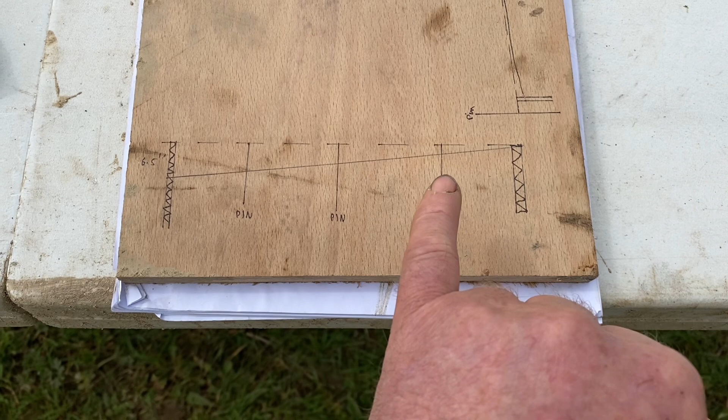So the way I've done this, and I'll show you in a minute, is we set our first tube, then knocked in a pin, and the pin is just under the length of my spirit level. I'm lucky enough to have a large spirit level, but if you've got a shorter one you just need a few more pins. Knock that pin into level, then knock that pin into level off that pin, and then when you get over to your second foundation tube, you've only got to knock that into level to that one, and we're good.

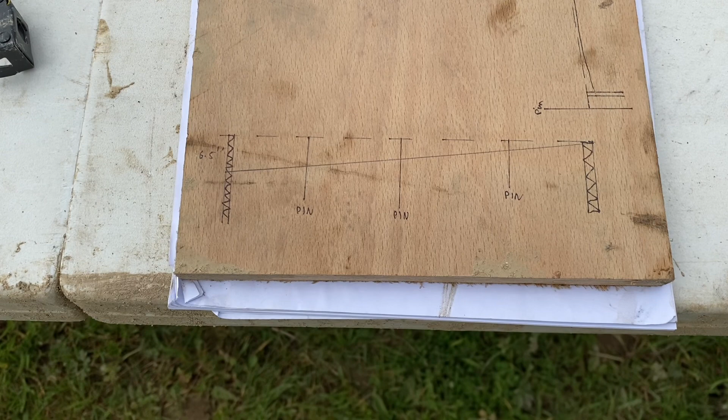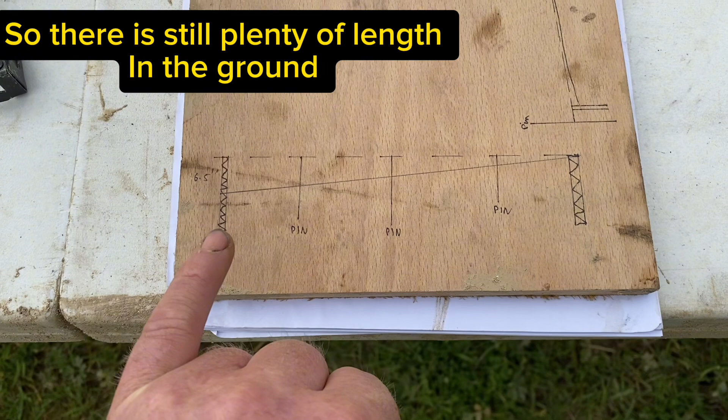Now, because I had a 6.5-inch fall, First Tunnels, who are absolutely brilliant, sent me tubes for one side that are 6 inches longer. When I ordered my tunnel, I said what I needed, and they sent out tubes 6 inches longer, no extra cost. Brilliant. Right, so that's the drawing of what we're doing.

We'll go down now and look at the theory. Not a theory - this is a theory. Look at it in practice.

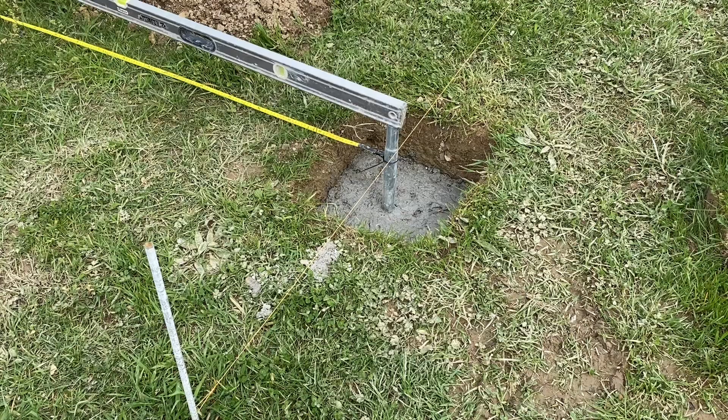Right, so previously we'd marked out and dug all the holes. So now what I did was sight the first tube and set the height with the string line. And I've concreted mine in, mainly because it's quite windy here, and also I felt just backfilling it with earth wouldn't give it the stability it needed.

So I've done that. I've mixed my own concrete because it's a lot cheaper than buying Postcrete. I just looked it up - you're looking at £13 a hole, and I've got 14 holes, so that's nearly 180 quid. Whereas the concrete, buying the cement and the aggregate and mixing it myself, I think it was like 55 quid.

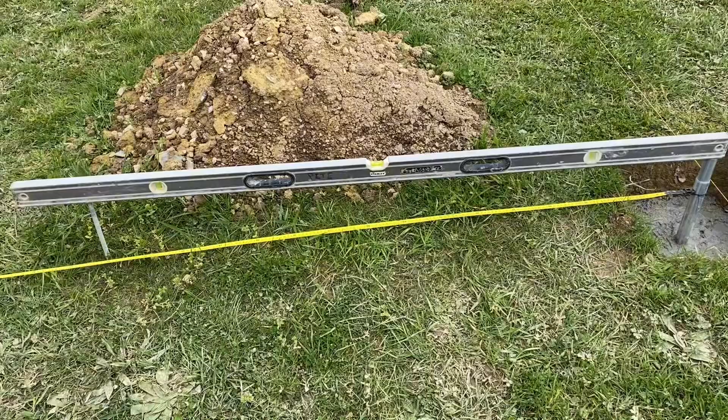Right, so like I said, you've got a slope from right to left. So what I did is have my level, and just before the end of the level, knocked in a pin. And all this is a bit of threaded bar - I find lengths of threaded bar really useful.

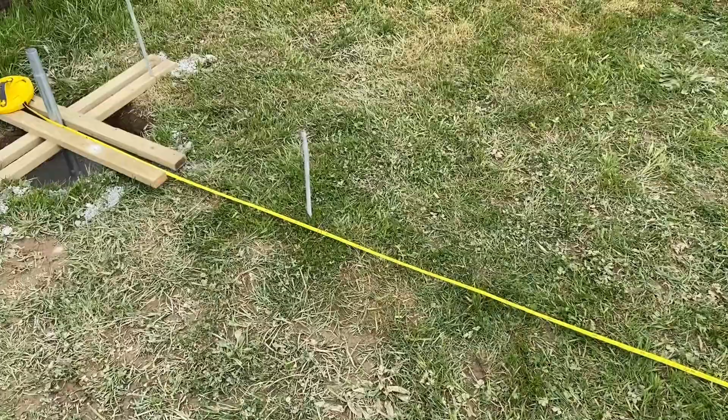So that's what we've done to that pin. Then of course we set another pin, and finally we set this height. Then you're level all the way across. And when you set your pins, just put them just outside of center, so when you're pulling your tape they're not in the way.

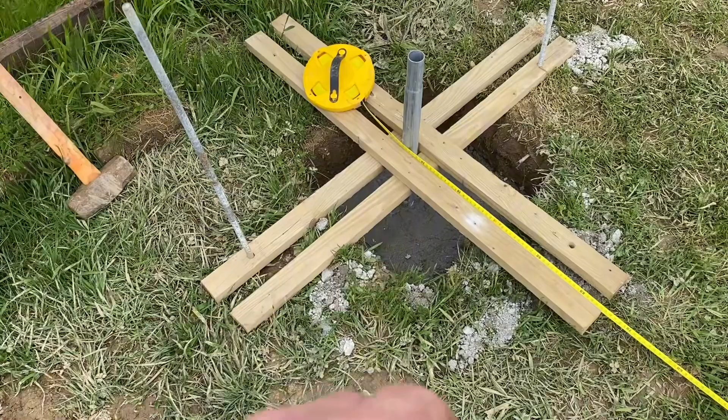What I've done is made up what I called a positioning spider. I thought I was a bloody genius when I thought of this, because trying to hold the pipe still and get it upright in two directions with your spirit level is a bloody nightmare. So what I did was cut out some batten and screwed it together so the hole in the middle was just the right size for the tube. Then I drilled a hole, and with 2 pins in opposite sides of the wood, that will hold that pipe exactly in position while you mess around with it, square it up and everything else.

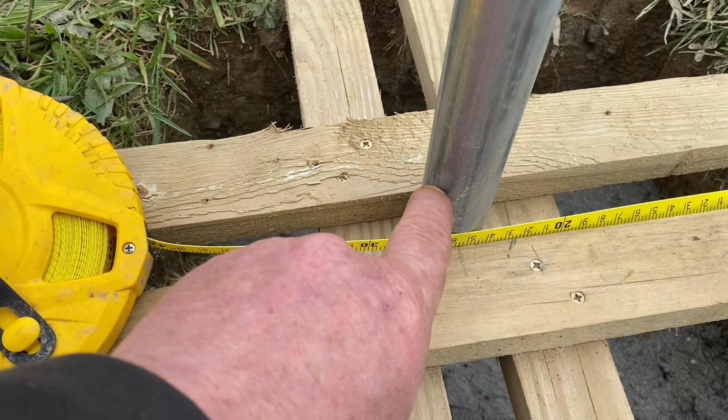Now, like I say, I'm working on my own, so in order to do the measurements correctly, what I've done is cable tied the end of the tape to your foundation tube. Now, all the dimensions that First Tunnels give you are from center to center of the tube. Now, obviously I'm on the inside of that, so the measurement at the other end, in this case a 14-foot tunnel, is 14 foot less the diameter of the pipe. All right, and that's what we've got here.

14 foot less the diameter of the pipe, which is 35 millimeters. All I did was put the pipe on top of the 14 foot mark and then measure the other side of the pipe, so we know we're good.

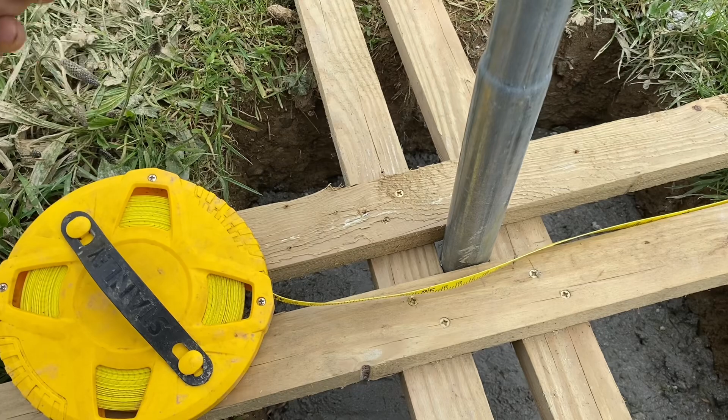All right, so in this way I was able to get it level, get it in position and get it upright. And just by using this 2-by-1 batten, it's meant I can get in around to backfill my holes. All right, so I hope you found that useful.

That's how I've managed to get this level on my own, and I can use these in each hole. Next we'll be doing the top holes, and I'll show you how to get that done easily as well.

One thing I should have mentioned is when I set this, I just did the one, let the concrete go off, so that when I was pulling my tape I didn't pull it over. So it takes a bit of time, but that's the joys of doing it on your own. I thought it was better to concrete this one in, let it go hard, and then I can pull my tape nice and tight and it won't pull this over.

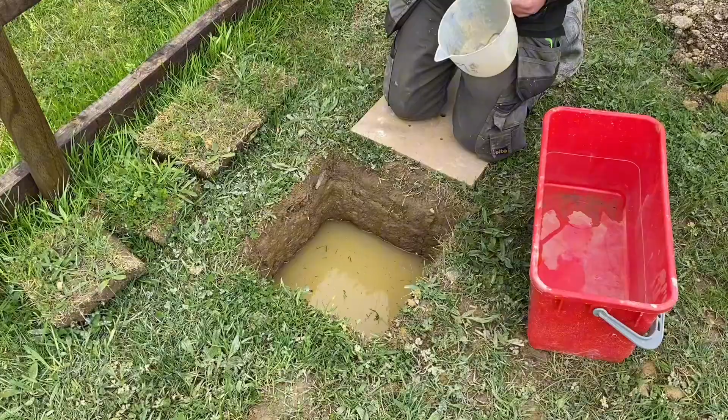All right, I think that's it. So the first job is bailing out the water. I don't know about you, but we've had a drop of water.

A lot of water. Right, I'll just crack on and get this done.

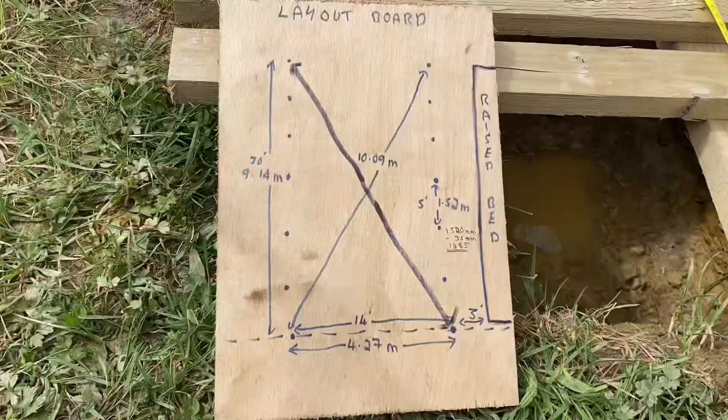I've shown this before when we marked out the pins, but what I do is draw out a layout board, so I've got all the measurements I need for the job at hand, because my memory is terrible. And First Tunnels is brilliant.

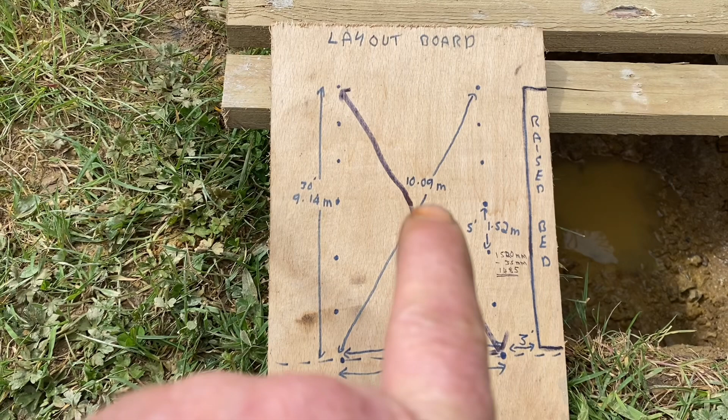In order to get it straight, they give you the diagonal measurement for your particular tunnel. So I know I'm 30 foot long, and the diagonal measurement is 1009. So all we have to do is position our spider where 30 foot and 1009 intersect, and then we know we're square.

This is what I could do with another pair of hands, really, to be able to show you. So we've got our 2 tapes cable tied to the inside of those pipes, and we know if we go from the inside of one pipe to the outside of the other, that's the same as being central.

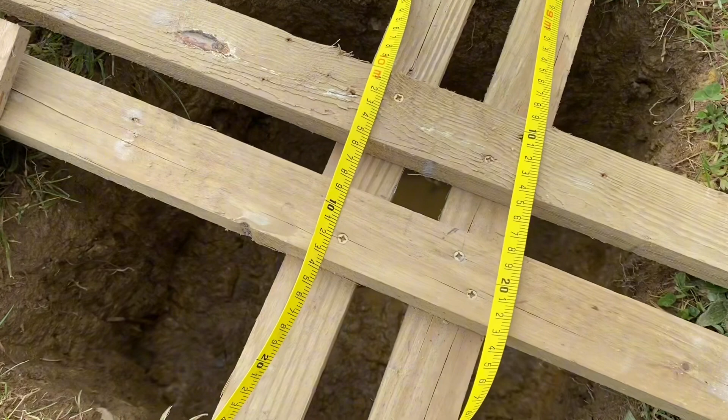So I'll just put on this one first. So that point there, 30 foot, and that point there on the cross, 1009, or within 5 mil. We're not building a house here, so there's a bit of leeway, but obviously the more accurate you can get it, and the easier you can get it accurate, the better it's going to be.

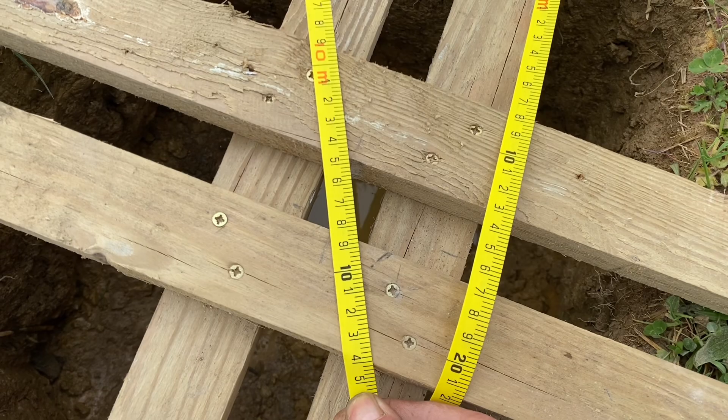So that's how I've done it. Position the spider, knock in our bars.

Now I happen to have this stuff here, 12 mil threaded bar, just got some kicking around. If you think that's a bloody good idea and want to do that, if you're going to get threaded bar, only get 10 mil, because most drill bit sets only go up to 10 mil when you're drilling the hole. So if you're going to do this, thinking it'll make life easy, yeah, just get a 10 mil bar.

And the other good thing with this, because it's threaded, when you're putting your string line on for getting your heights later on, the string will sit in the threads and won't slip up and down.

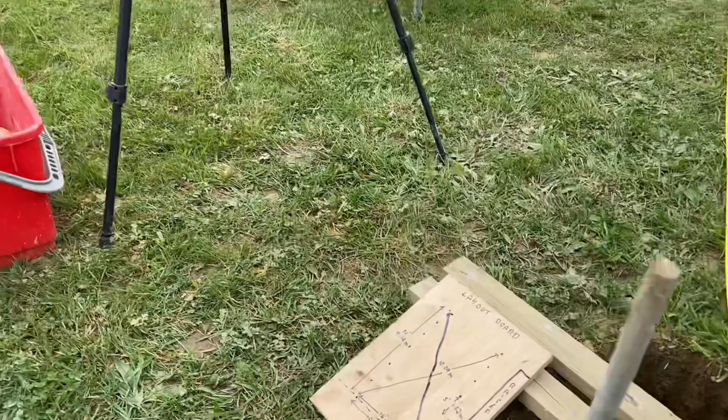I just got to do the far side one now, because I've got 2 of these spiders. I'll do the far side, check my measurements across as well, double check everything just in case, and then we can put the foundation tubes in and concrete them in.

So this is the other side. Done exactly the same with the 2 tapes, the diagonal and the upright, and I've also measured across, and that's 14 foot, so I know the position of these is correct.

And now it makes it really easy to put your little spirit level underneath and then square it up and get it upright, because otherwise you've got to try and hold it upright in 3 positions, bang it in and stop it moving. It's a nightmare.

But by doing this with my positioning spider, once you put your 2 pins in, that can't go anywhere, and you know you're right. So then you can mess around getting it upright and level in 2 positions easily, and then concrete it in.

Right, do that next. I'll crack on and show this out the ground, because it's a lot easier than trying to see me do it lying on me belly underneath there.